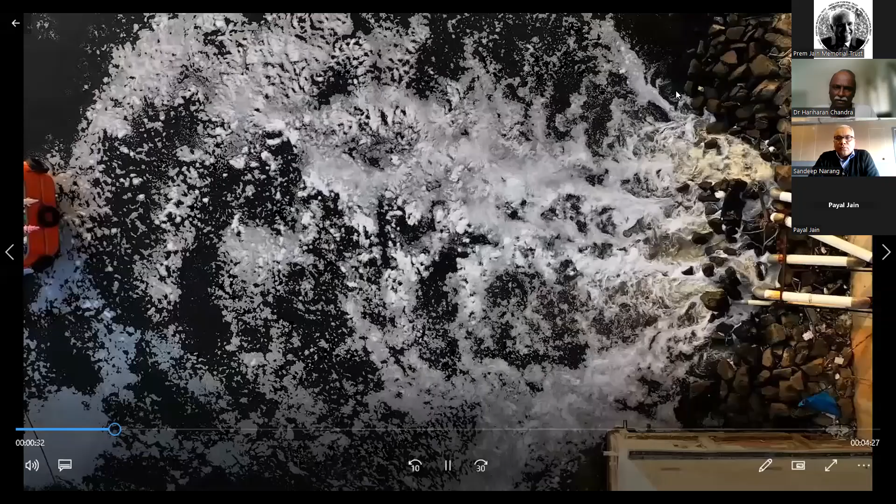Okay, fair enough. Yeah, it's okay. We'll play it a little after if it's necessary.

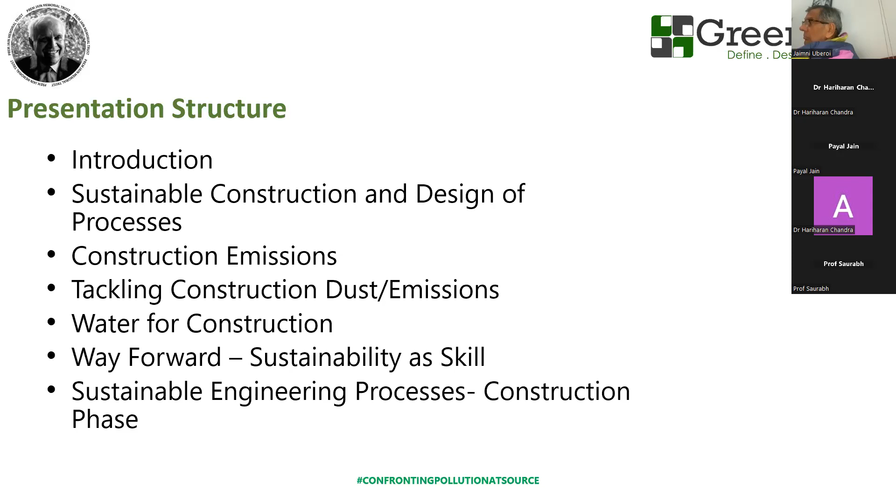And then the way forward for sustainability as a skill and sustainable engineering processes in the construction phase. Because I believe lots of civil engineers or people from the construction fraternity are over here - I am myself a civil engineer - so how civil engineering has evolved over the years. When I started my career in 1988, that's 35 years ago, in engineering we used to work within 3 triple constraints, we used to call them: cost, quality, and time. These were the 3 factors we looked at whenever we had to take any calls or decisions within projects - whether it affects the cost of the project, whether quality is getting compromised, whether time is getting extended. But what has changed over the last 5 to 10 years is that sustainability is now an equally important pillar.

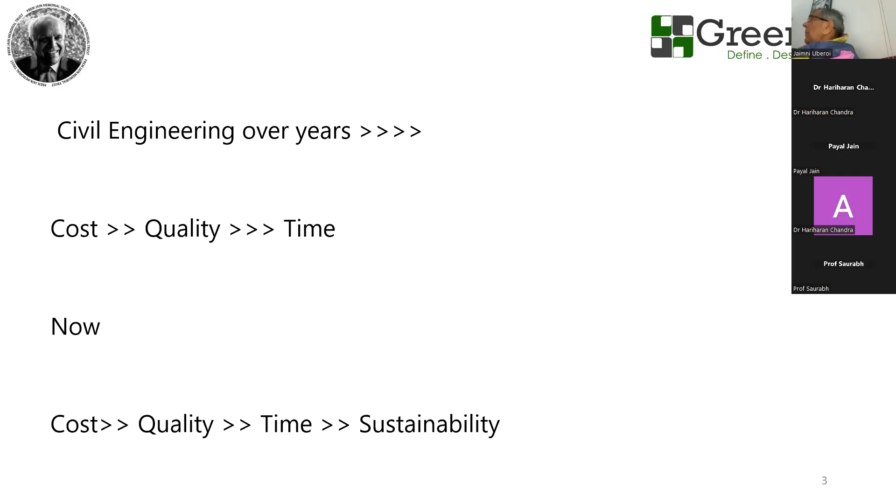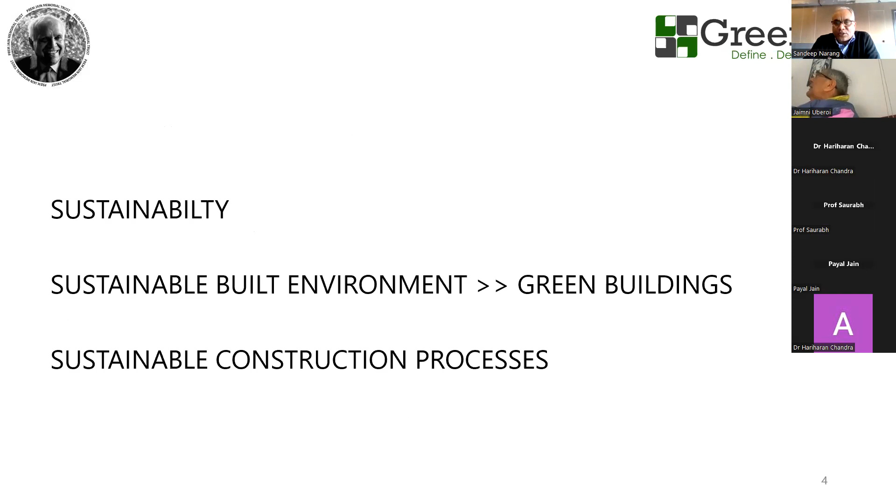So from the triangle of cost, quality and time, we have shifted to the rectangle of cost, quality, time and sustainability. Air quality is stopping work not only in Delhi, but Mumbai also, and sustainable processes, sustainability, sustainable built environment, green buildings, sustainable construction processes - these discussions are happening within the construction fraternity.

Why are these discussions happening? What we have seen since 2009-10, when the green building movement started, is that within the construction scenario, any construction project goes through three phases. One is the design phase, second is the construction phase, and third is the operation phase.

Design phase - if you talk about a real estate project of say 12 towers, that's usual in NCR or anywhere - takes at least 12 to 18 months, when the project gets conceptualized or designed. Because architects are well aware of green buildings and sustainability, a lot of capacity building has happened there. So the designing is green.

Then comes construction - 4 or 5 years that the project is under construction. What's happening during those 4 to 5 years when the project is constructed? The same green buildings which are being designed - what's happening within that construction scenario? And then comes when the building gets handed over to the end user.

So in the operation phase, we tend to get the results out of whatever design has taken place, or the design engineering shows the result of energy efficiencies.

But the fact is that during construction, not even the bigger companies are bothered about water efficiency or energy efficiency. Are we spending the right energy? Everybody is in a rush to get the construction completed. Even the outdoor air quality during construction is neglected. So the construction phase is somehow not green, that's what I want to say.

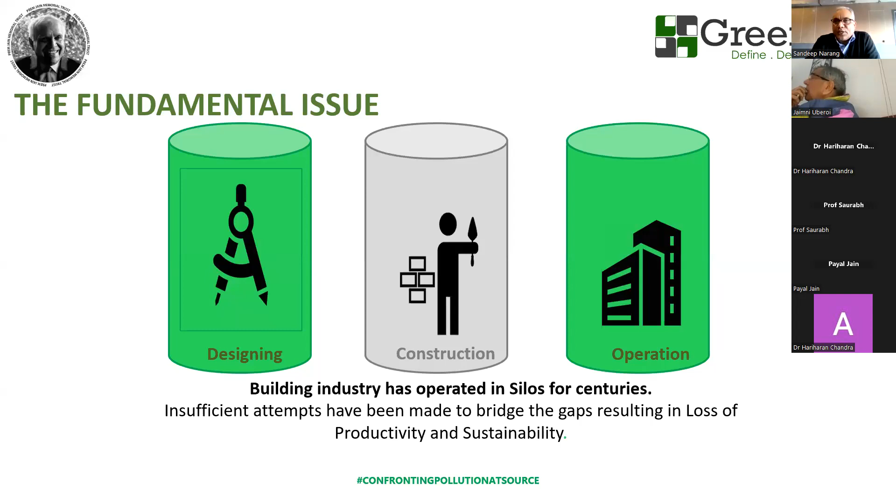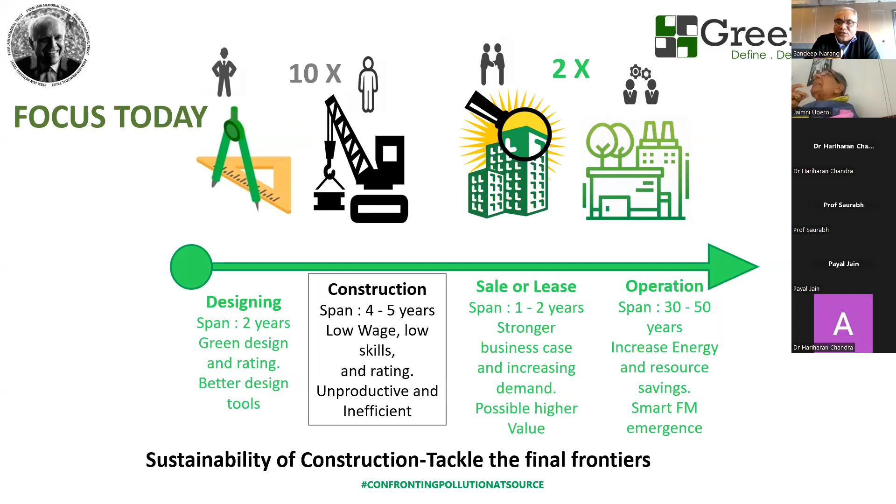And why is that? Because during construction, we work with low wages, skill sets are low, and unproductive and inefficient techniques are being used within India - that's in the majority of projects. So that's one of the reasons why I would say that sustainability of construction is tackling the final frontier in the landscape of the green building space.

What do we mean by sustainable construction practices? Intelligent utilization of water during the construction phase, measurement of energy and water consumed during construction. It's a rarity - nobody is even measuring how much energy we could have saved during a construction phase.

If I give you a small example - say if a project is worth 1000 crore, the energy cost to the project, that's from what we get from the grid or the fuel we use for the gensets, is close to 4 to 5%. So 40 to 50 crore rupees is being spent on energy bills or diesel bills or gensets, and there is easily a scope of saving at least 10 crore from that. But nobody has come up with the data or shown the intent to save energy during construction.

That's the hallmark of a green building. Air quality for construction will be the focus topic today. Reuse of construction and demolition waste - can we create zero wastage projects, projects where we are not wasting any of the natural resources? That's one of the ideas where I want this discussion to go.

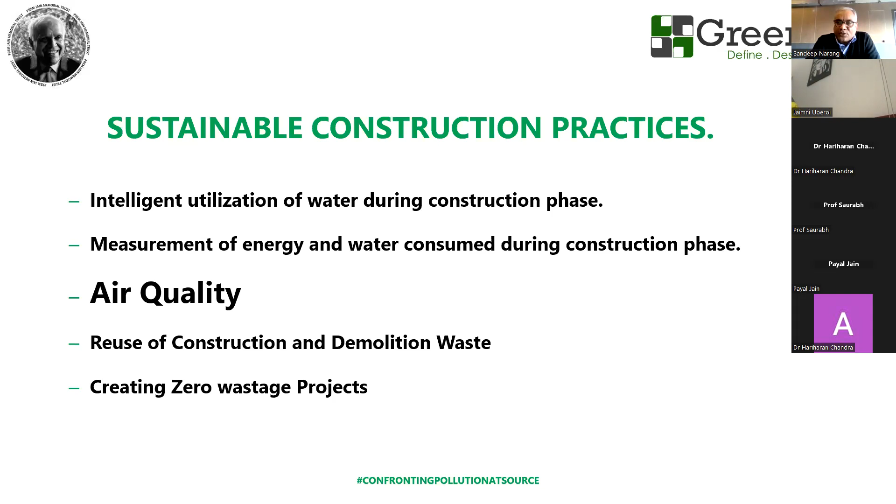And why I'm talking about construction and how this has come into prominence - around 6 years ago, the Honorable Prime Minister came up with the National Clean Air Programme. It's written for 122 cities, but it's 131 cities now, where air quality has gone beyond what's recommended by the CPCB, Central Pollution Control Board, for good health practices.

Delhi is one of the most polluted capitals of the world, we all know that. Besides Delhi, there are 131 cities - even Jaipur is a very polluted city. Mumbai, although on the seashore, had a 10 days construction ban in December because of the AQI level going beyond 250 to 270. So this is one of the problems.

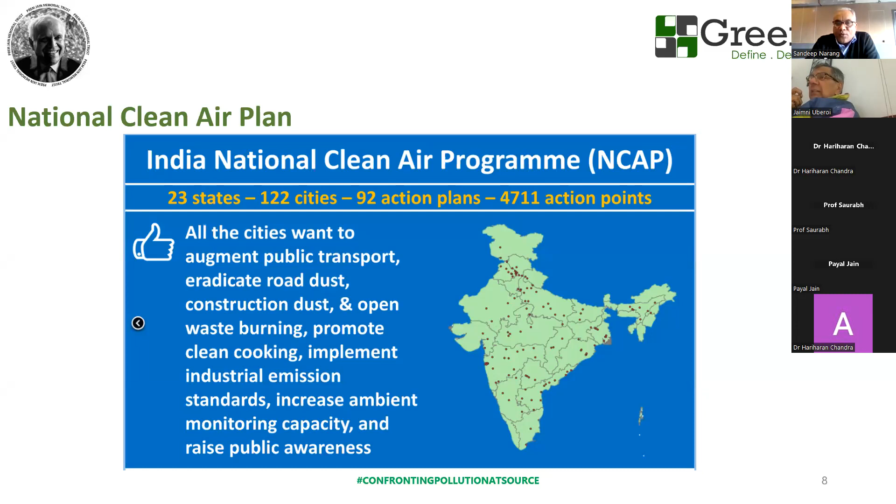And what happens once a city is a non-attainment city - they do an apportionment study. Apportionment studies look at from where all these pollutants are coming - usually industry emissions, transport emissions, municipal solid waste burning, or emissions from construction projects, road dust. Based on the apportionment study results, we start treating each polluting source.

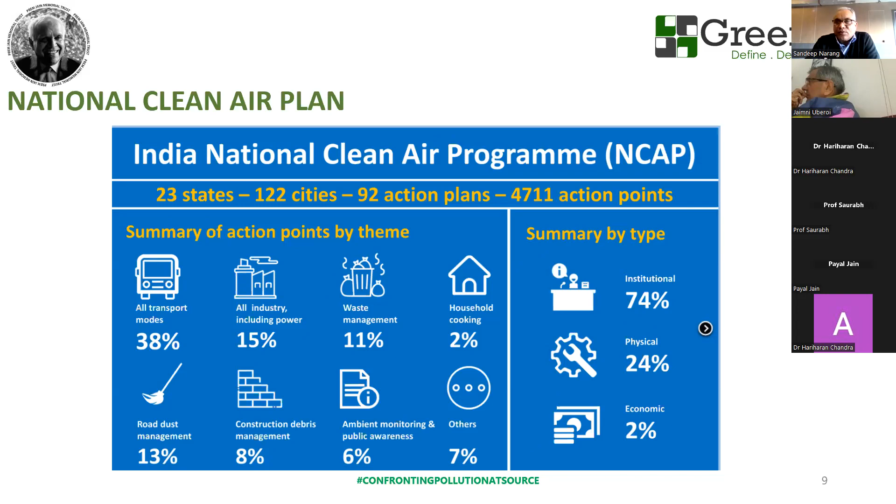I am working in the field of construction emissions with a few international organizations as a consultant. Why are we talking about this? Yeah, I worked as senior vice president for a real estate company. When a project which you are heading gets fined by government or anyone, it gives you a very bad report.

This is a news item from October 8, 2021, the first day of GRAP, the Graded Response Action Plan, in Delhi. The day AQI went beyond 300, Delhi government ordered a ban on construction sites. Delhi Environment Minister Gopal Rai went for an inspection and fined a construction firm 5 lakh rupees for violating dust control norms in Delhi.

Why is this very important? Because that project site was in Pragati Maidan, the ITPO, India Trade Promotion Organisation site, and the company doing the construction was L&T, which is the number one premier construction company. There were smoke guns over there, and the tarpaulin net had been put up for show, either in parts or completely torn apart. That's what the news item said, and the company was fined 5 lakh rupees.

I was doing one of the capacity building programs for DPCC, and I met the project manager, the project head of that project site, and he was feeling so bad. He said, Sandeep sir, I'm feeling so bad. Why am I showing this? At project sites, whenever anything goes wrong, we do root cause analysis - why this thing has happened at my project site, why my site got banned or fined - and we try to find a way. We civil engineers, that's part of being project management process, to do root cause analysis.

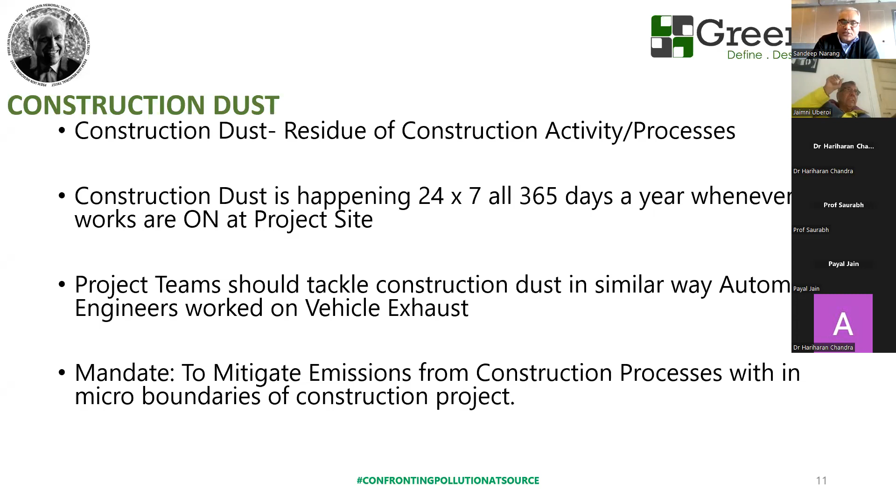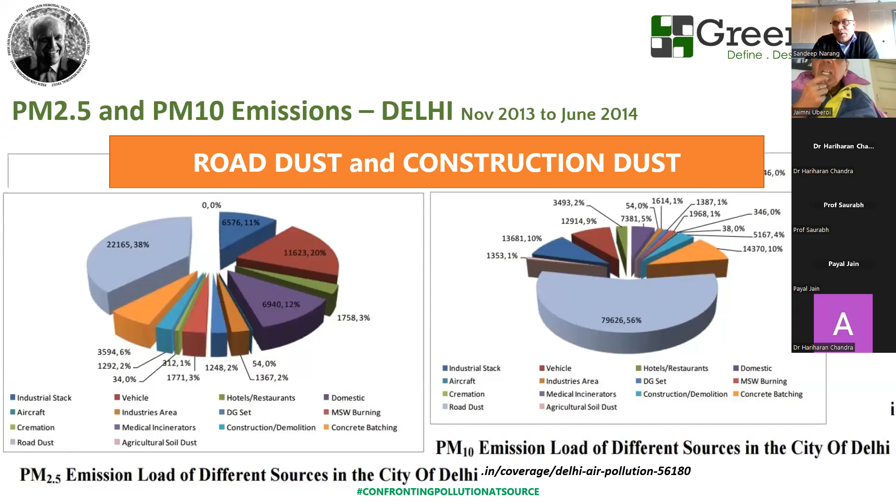And for the information of Jaimni Uberoi sir, in Jaipur, road dust constitutes 70% of PM 2.5, if you go through this same apportionment study of PM 10 for Jaipur. So there is a lot - if you travel around Jaipur, going around the streets, we can see there is lots of road dust. But it is more in Jodhpur than Jaipur.

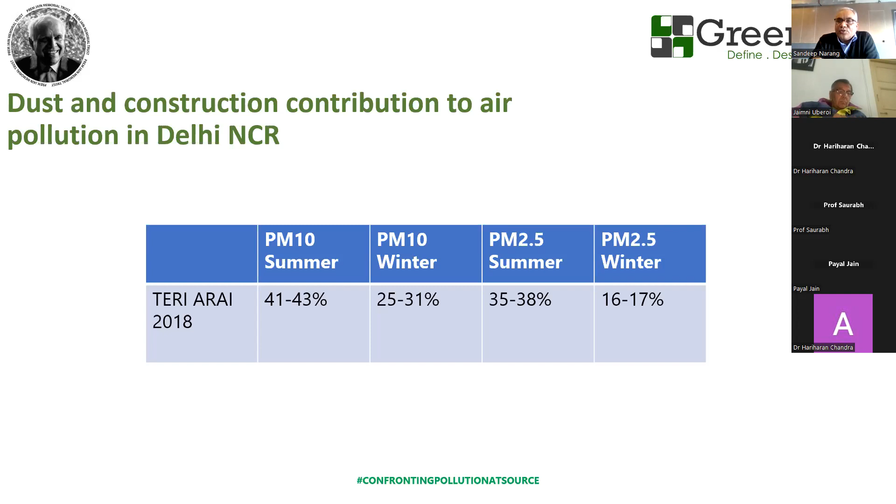Yes sir, so dust and construction contribution to air - now this is another interesting study. In summers, we see more PM 2.5 and PM 10, around 20 to 30% more construction emissions happen during summers, but not in winters. But what's happening is, because of the climatic conditions in Delhi, our construction projects get banned during the winters, which is again a point we've been putting across to DPCC, NGT, and others, that we shouldn't be banning construction projects, rather controlling the construction emissions.

I'm part of this study happening at Surat, as Dr. Hariharan had mentioned - road dust source apportionment, looking at what proportion of construction dust goes into road dust. There are no studies in India about this, so we'll be doing the first one. From preliminary reports, construction dust is responsible for a very big fraction of road dust. Wherever construction is happening, you can see the percentage of road dust is very high. Like people who live in Delhi, if you go around Pragati Maidan, you'll see it because that underground tunnel was being constructed there - there was lots of road dust around Pragati Maidan.

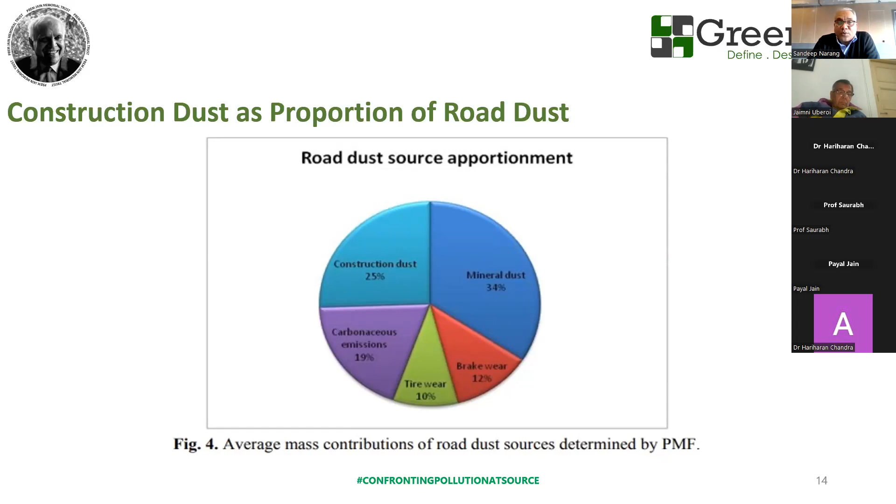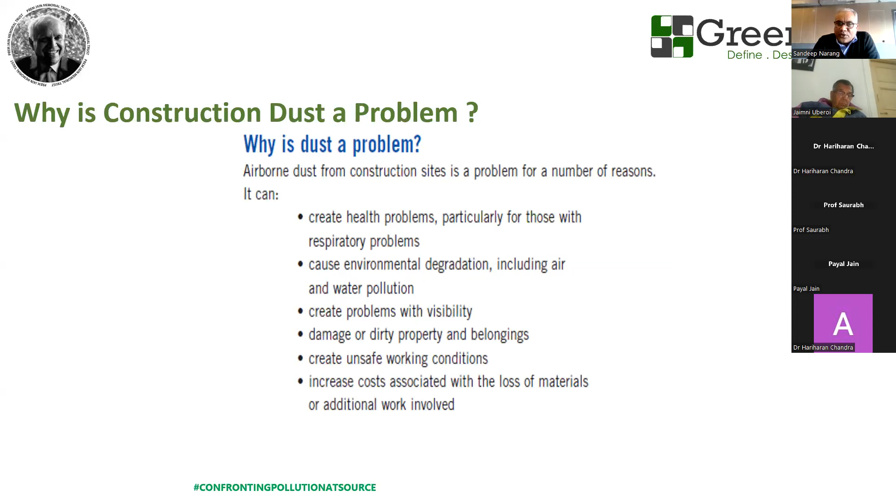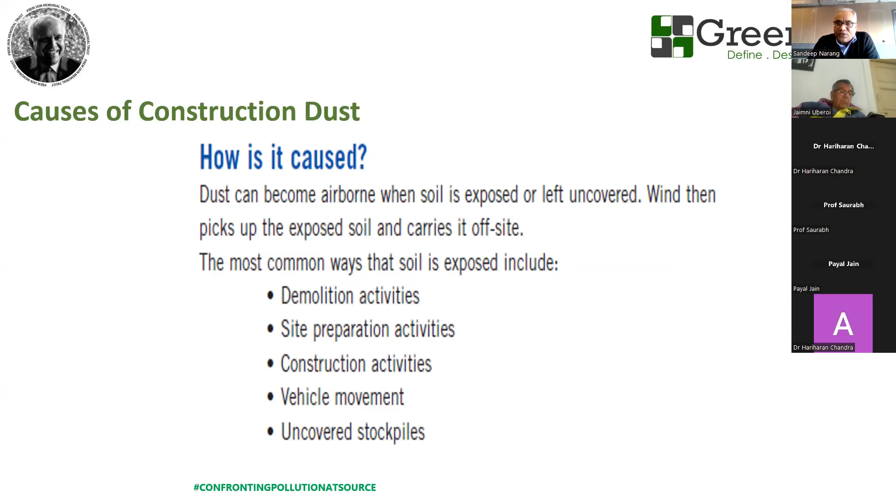Why is construction dust a problem? It creates health problems, environmental degradation, problems with visibility, and unsafe working conditions. These are a few processes that cause construction emissions: demolition activities, site preparation activities, vehicle movement. The benefit of effective construction dust control is huge within the landscape happening in Delhi - it makes you a responsible company, and we are losing lots of finances because construction is being closed for a month every year.

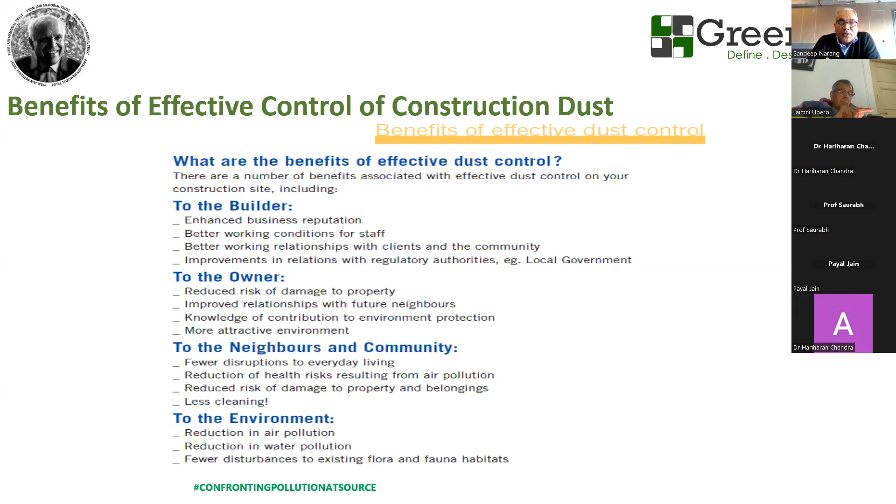There are two factors on which the amount of construction dust depends. I am working pan-India on this subject. One is the soil type. In Delhi or Jaipur we have alluvial soil where the clay percentage is more, so whatever small disturbance we do to the soil, lots of PM 2.5 comes out and hangs in the atmosphere. Whereas working in Maharashtra or Gujarat is easier because there we have black cotton soil, which is more firm and has less clay content. So soil type is very important.

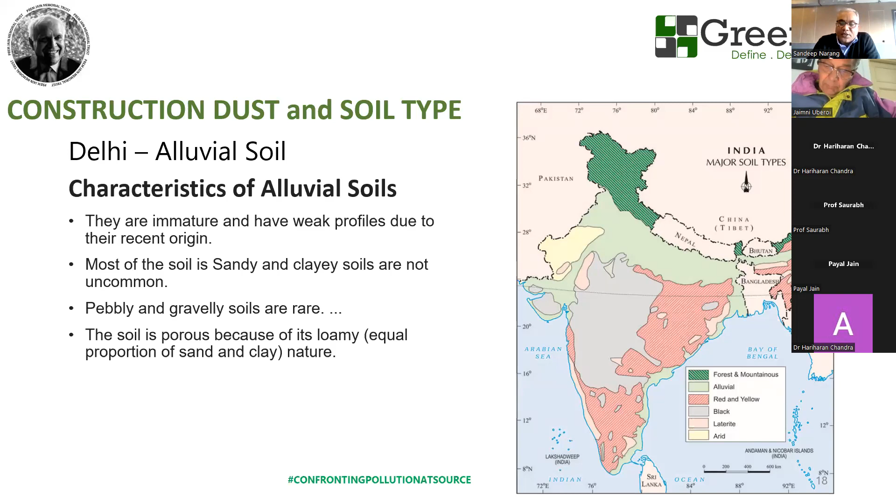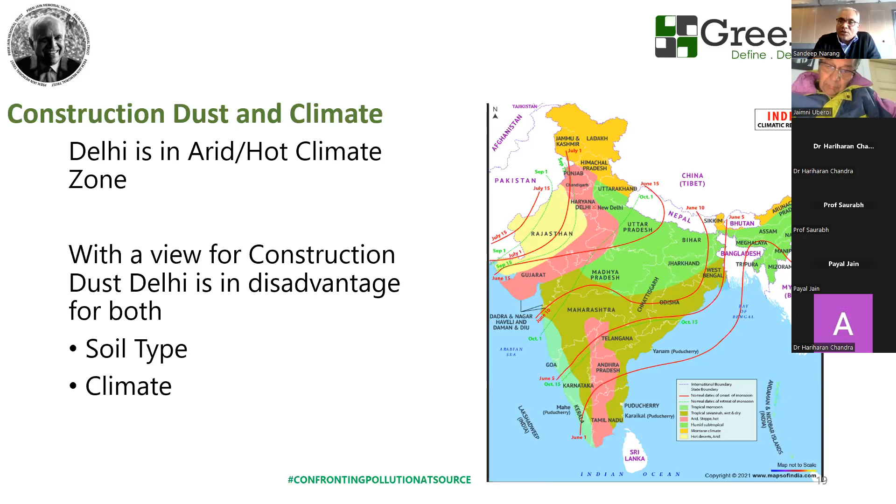The second factor is the climate zone where we are working. If the engineering team can understand the soil and climate, the same excavation happening in Delhi in July-August will produce less PM 2.5 and PM 10, whereas when it's happening in March, there will be more construction emissions. So the construction project team can manage that by doing lots of fogging or improving the moisture content within the project site. These are the two factors.

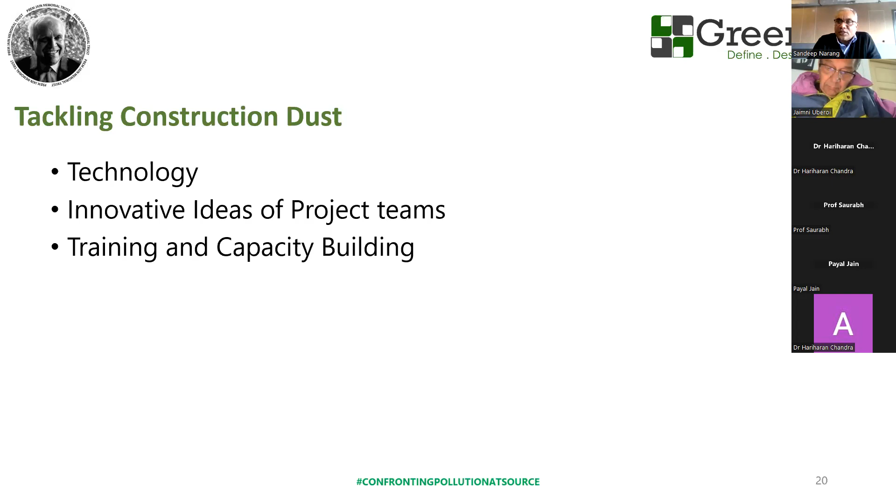We go through three points when we tackle construction emissions: use of technology, innovative ideas from project teams, and how project teams can tackle construction emissions. This subject is very new - very few people are having discussions on this in India. I am the only civil engineer who has put together 3 or 4 guidelines for different municipalities on how to work on construction emissions, training and capacity building. This is also one of the factors, because people working on project sites have zero training on how to tackle construction emissions.

National Building Code, Volume 2 - I even put the page number - says that we should be measuring outdoor air quality within construction projects. In Delhi, for the last 2 years it was made mandatory; in NCR, it was only made mandatory last year. It's already there in the National Building Code, but none of the projects pan-India put up air quality monitors to know what's happening around the project site during different processes.

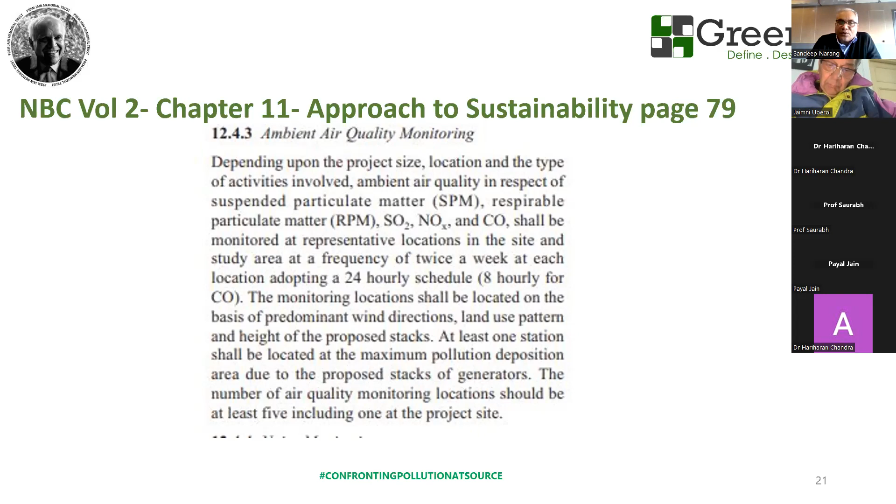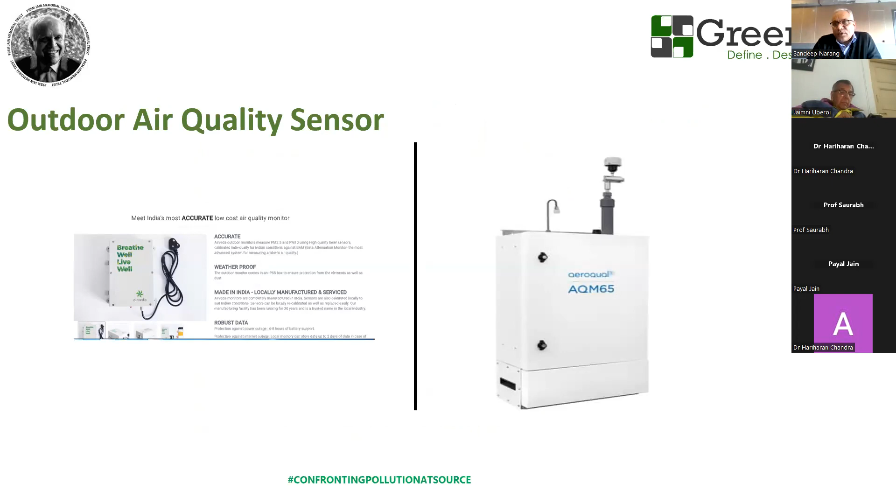So outdoor air quality sensors - we have been talking to NGT, the National Green Tribunal, and pollution control boards. We requested them to allow low-cost air quality monitors, and they are okay with it. So all construction projects or the construction fraternity should be doing air quality monitoring. I will show the case study where this helps too. So monitoring for construction dust is one of the very important uses of technology.

Fogging machines for settlement of dust - in Delhi it's again mandatory, not in the rest of India. It's important because when we know about the processes, fogging should be process-based, targeting whichever process is emanating PM 2.5 and PM 10. If the project team has a fogging machine, they can control PM 2.5 and PM 10. But in Delhi, what they did was mandate 3 hours of fogging in the morning and 3 hours in the evening - that's a waste of water and energy, because construction sites are not emanating emissions all the time.

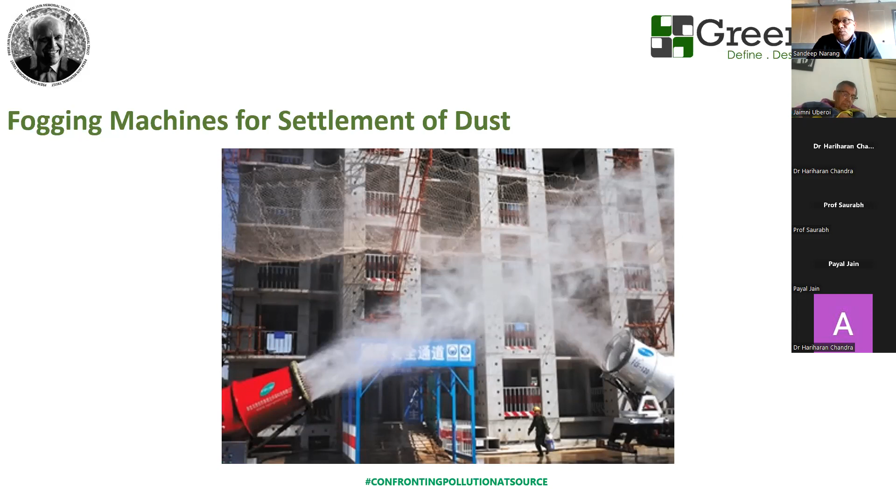There are only few processes which produce emissions, and the project team has innovative ideas. The project team knows best when to use this fogging machine. So I have been putting this point across with pollution control boards, and a few of them are accepting this - not to make fogging machine mandatory, but process based.

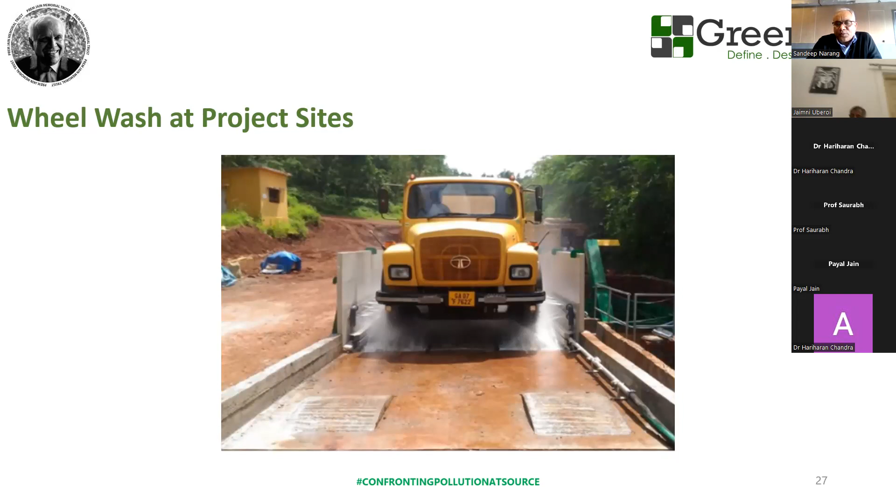Fogging machines are very good for settlement of dust when demolition is happening. Wheel wash at project sites is also mandatory again. Very few projects have these wheel washes at the site, and it doesn't add very much to the cost - hardly 3 to 4 lakh rupees is needed, and even the water used for the wheel wash can be recycled.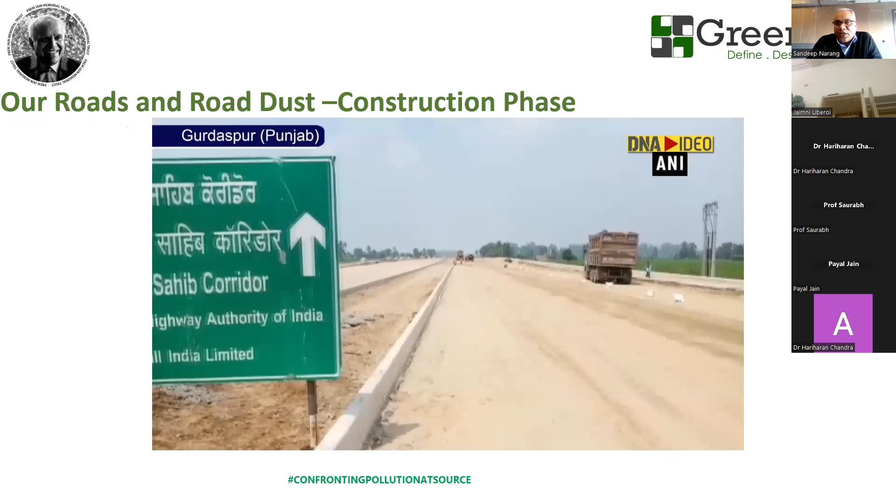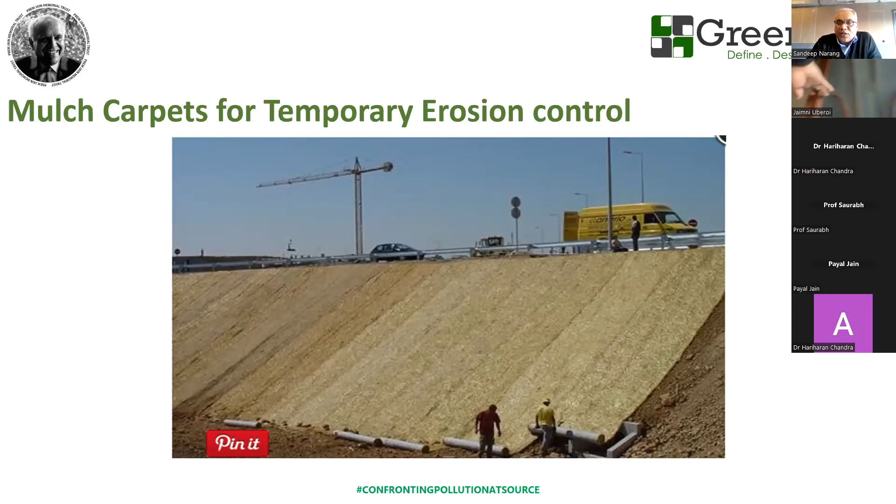This is how we did it - this is a photograph from the road construction happening for the Kartarpur corridor in Punjab. This is how we construct the roads, and outside India they use mulch carpets to help stabilize the banks. In India we don't do that. Mulch carpets are very effective and very low cost solutions.

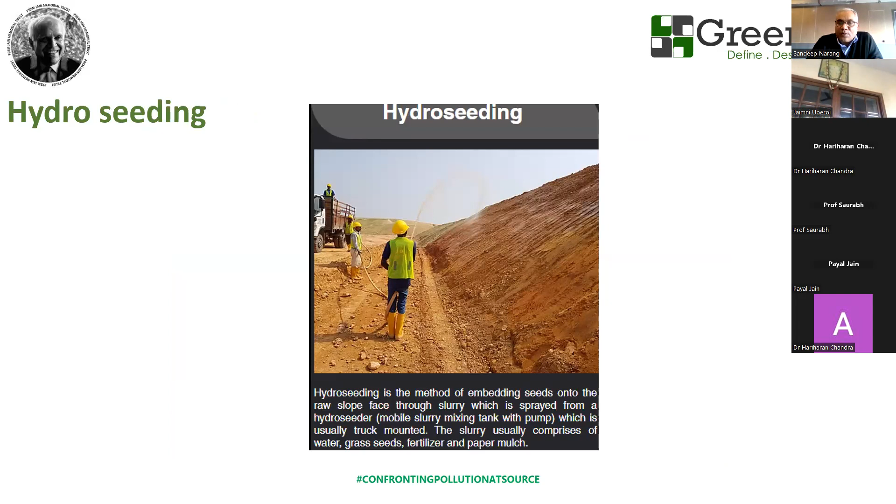Hydro seeding is one of the solutions rarely practiced in India, but now in Delhi and other areas we are trying to make companies realize that by just putting low cost grass on the embankments, it will help curtail erosion. Hydro mulching is also one of the ideas.

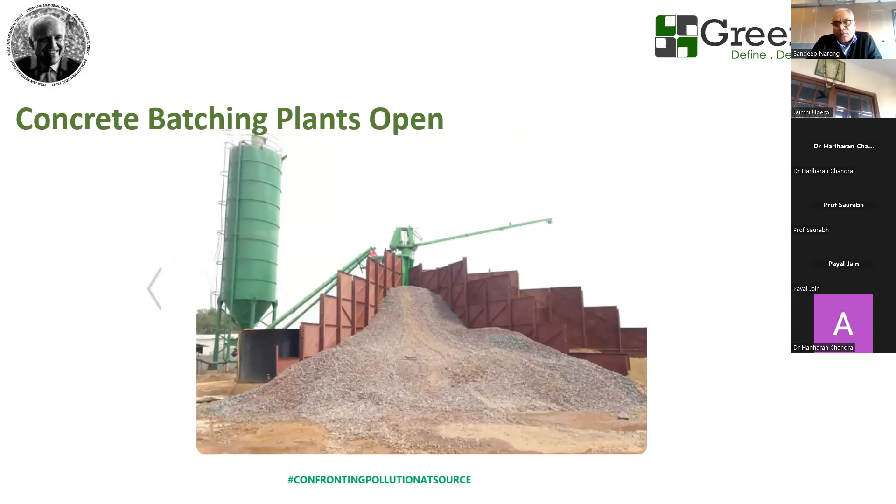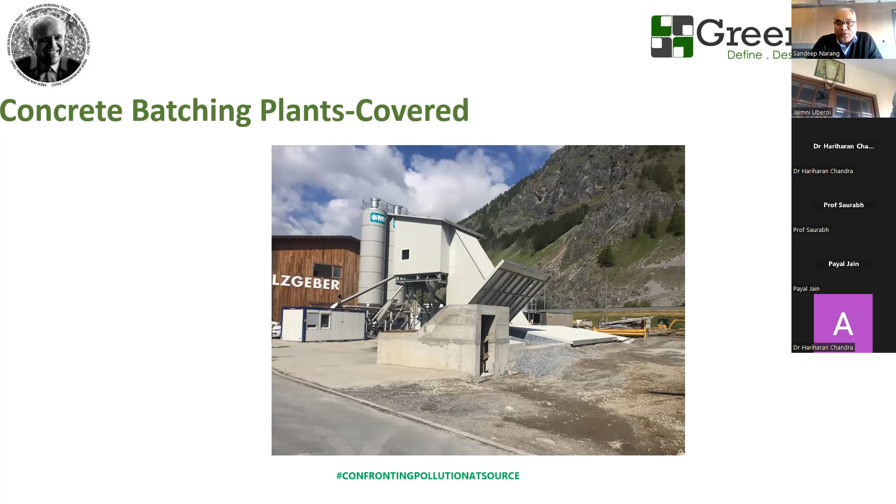Concrete batching plants are open in Delhi and North India, whereas the Pollution Control Board or Maharashtra Act say you have to have closed, covered concrete batching plants, which will be effective in controlling construction emissions from a batching plant.

We have a project schedule at all projects. Similarly, if we can have a construction dust mitigation schedule, there will be no surprises for the project team - we the project people will know when this particular process will be happening. We have a whole 60 months project schedule, so if we can use this to create a construction dust mitigation schedule, it will be quite helpful in controlling construction emissions.

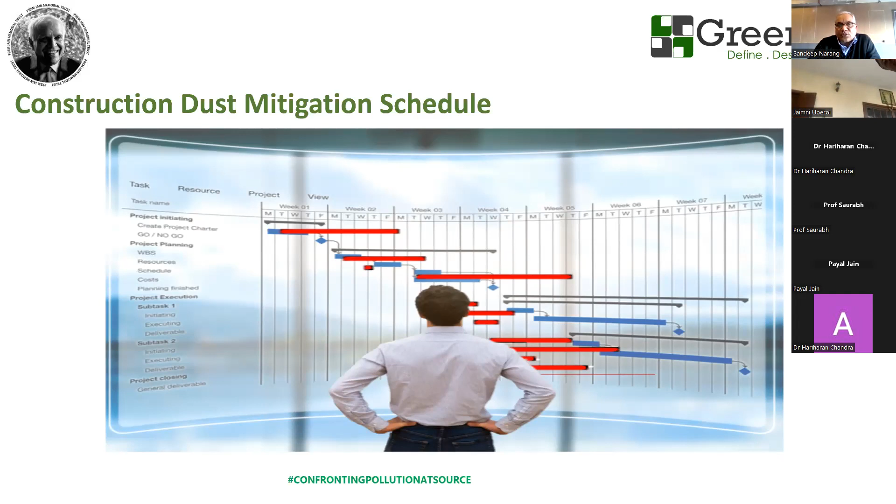I have been part of 3 or 4 handbooks I have mentioned that can be downloaded from the internet for free - one from the WRI site, the other from the Clean Air Asia site. These are the 2 handbooks where all these discussions have already been mentioned. Dr. Hariharan talked about the work in Surat.

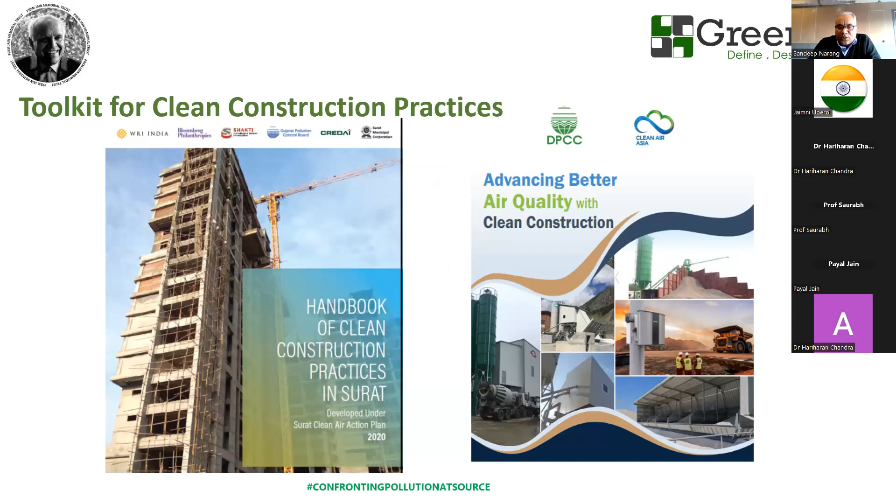So this is my first part, what I wanted to talk about - air quality. I will take just 2 or 3 minutes talking on the water part.

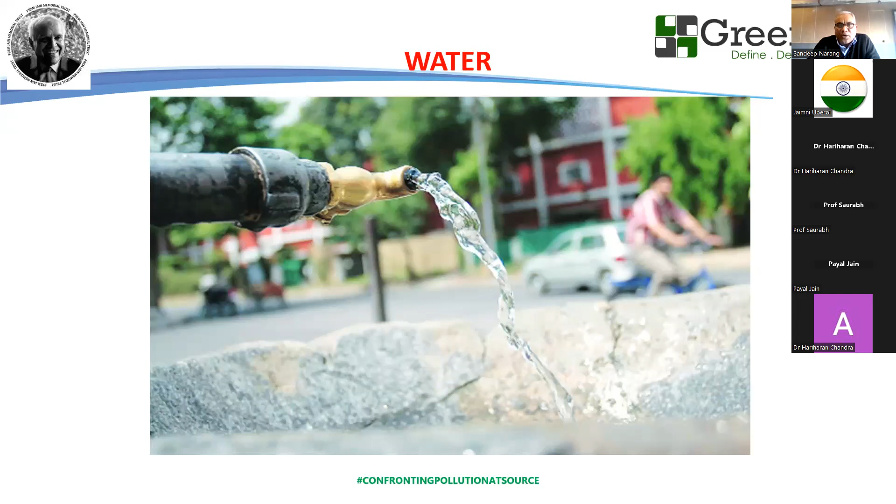Underground water extraction was banned in Delhi, but still we have been taking out water, and even in Noida there was a government decision to ban construction. They said we don't have water for the houses already constructed in Noida, so why make more construction? We are losing water at 3.87 meters per year of the underground table, right on the banks of the Yamuna or Hindon River. So there is no water.

Water in Noida - when I started my career, water was at 20 feet. Now it's at 400 feet in Noida. This is what has happened to water in India.

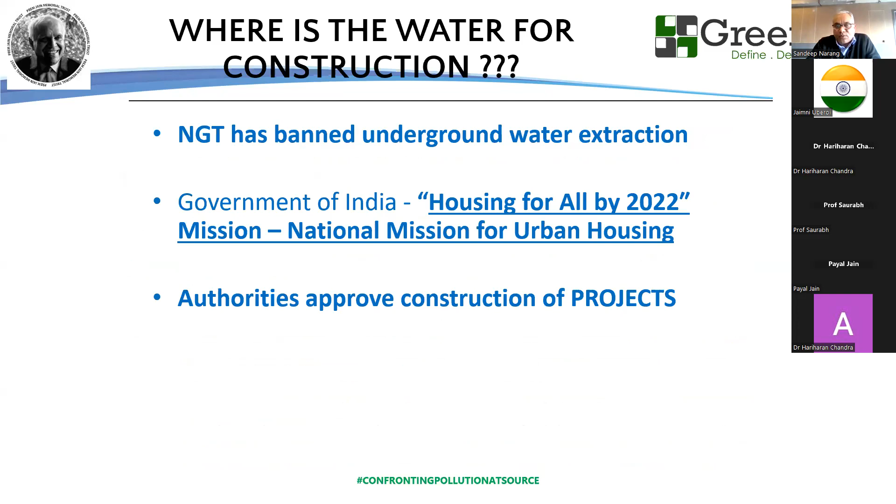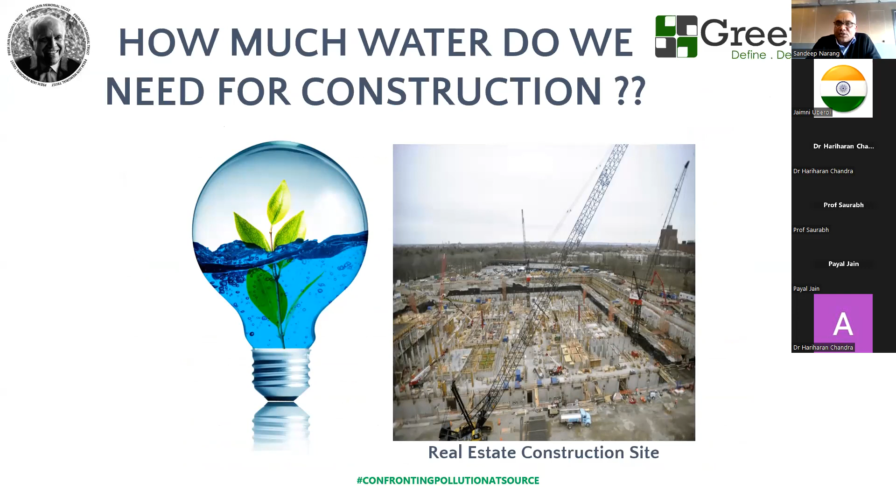Now NGT has banned underground water extraction for construction. Again, the government says housing for all, development has to take place. Authorities approve construction of projects knowing there is no water for construction. We are not doing any qualitative or quantitative studies of how much water we actually need for construction - direct water, embedded water footprint, is the water we need for the construction site.

There's only one study on this, from Dr. Suchandra - students who are interested can Google about this study. It says that 132 liters per square feet of construction was used in an 18-story apartment.

I did a few pilot programs where we quantified the water, and we came to a discussion that so much water is never needed. In that white paper by Dr. Suchandra Bardhan, she had two pumps at the project site - one was 6 bhp and the other 8 bhp, and whatever water was taken out was used as consumed water. Whereas from my studies, if we account for not wasting water, the same project can be done with 60 to 70 liters of water.

So any student or anyone interested in knowing more about this can contact me. I will be sharing my numbers and address at the end of this program.

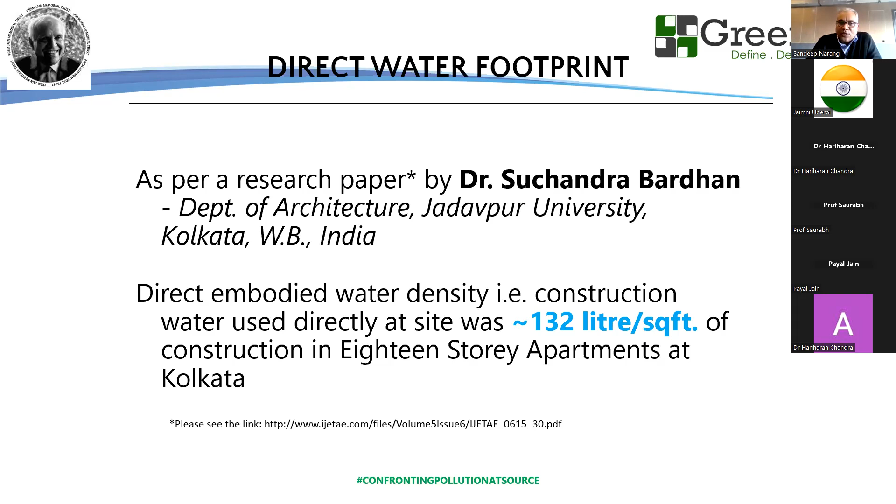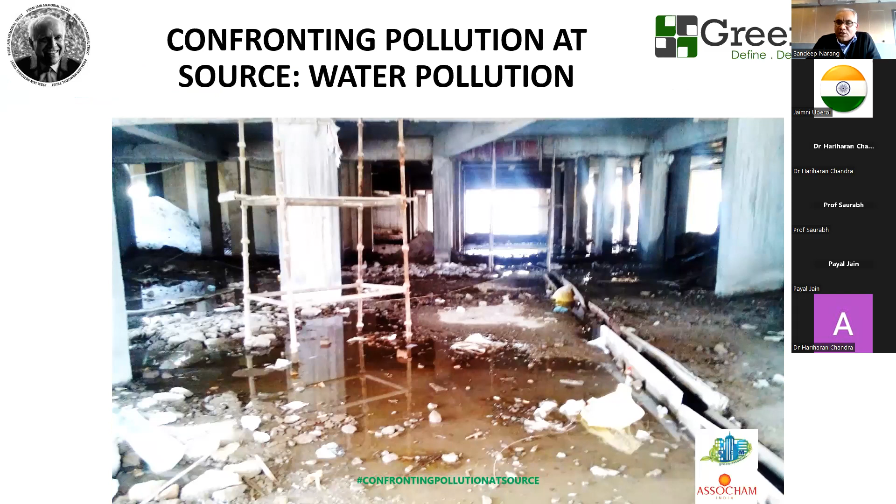If at a project site you see signs like this, water pools like this, it means that water is being wasted. If you see a basement of an under-construction project with water pooling, then it means water has been wasted at the construction site. These are bad photographs from a construction project I am showing in the presentation.

Now, what is the way out? We have been talking about problems on construction emissions and water. Why is this happening? In India, when we go and look at project teams and their skill set, people in top management are very few, and they have skill sets with respect to sustainability, or they have been exposed to other improved construction methodologies. What about mid-management? There are more people in mid-management, and the skill set goes moderate. And supervisory or staff workers are low-skill, lowly paid workers, and their skill sets are absolutely zero.

And this we call the knowledge matrix of a project. We call it the iceberg of ignorance. The problems I have been talking about—tackling construction emissions, wastage of construction water—all these problems are happening with the people who have a zero skill set.

Again, how do we go about it at a project site? So at a project site, whenever we want changes to happen, we go through this, and this we call a man management technique. We call it the OODA loop: observe, orient, decide, act. Everyone uses it—even Swachh Bharat Abhiyan is one of the biggest examples of the OODA loop, where lots of observation was put into the whole citizenship of India to keep India clean.

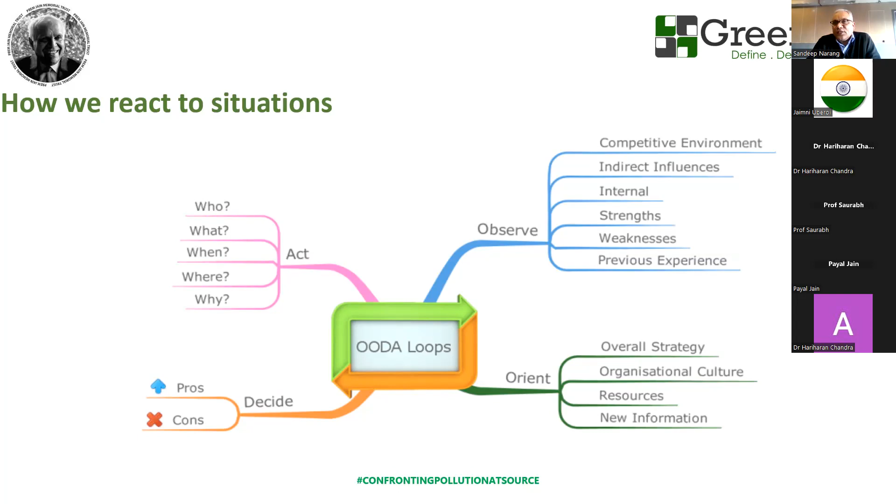All the big film stars, cricket stars, comedians—they came and helped keep India clean. The Prime Minister spoke about keeping India clean. But go to any project site, and you won't find any signages about not wasting water or any good thing that has to happen with air quality and construction.

If we talk about the way forward for construction companies and builders, it has to happen in three stages. First is the informative stage, where we should be putting visuals at site, going through that OODA loop. The company should be having a company policy for air quality during construction, water use, and energy use.

Then the second phase is the voluntary stage: train staff for sustainable construction practices and lean construction management. It talks about stopping wastages, or it classifies the wastages at a construction project. Then we can come down to the third stage, where we can link it with the key responsibility areas of the project teams.

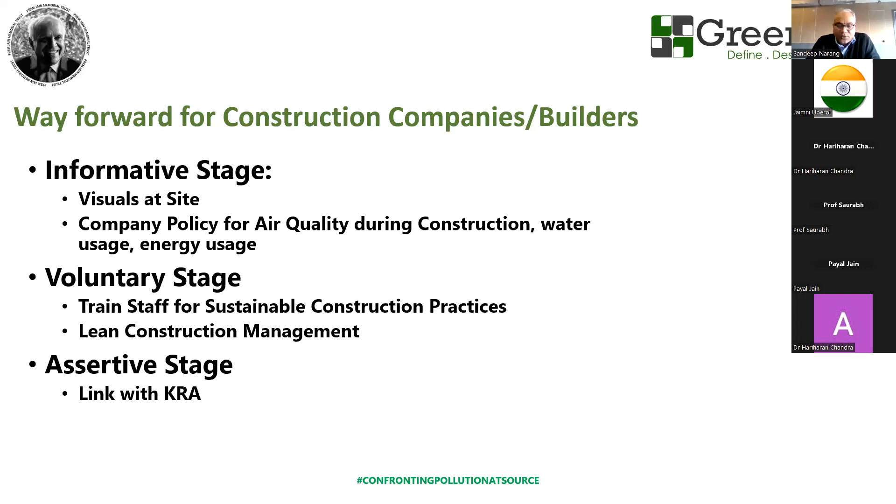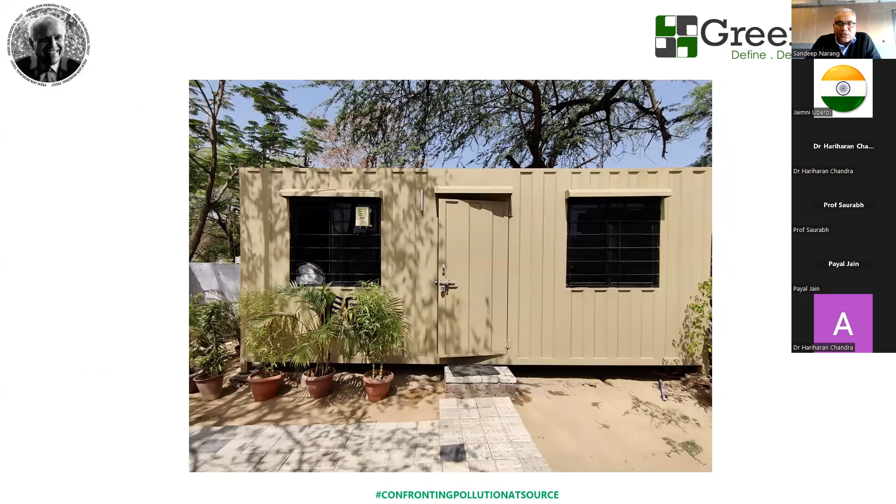I will show a case study of Jaipur. It's one of the Trimurti Group projects, where we have a single tower being constructed. I'm sorry I can't share the case study of Surat, because I am under a non-disclosure agreement, NDA, with WRI, where I can't talk about that project.

The reports will come from WRI, and that will be shared across, say in two to three months. Everyone will be knowing, and then even I can share it within my presentations.

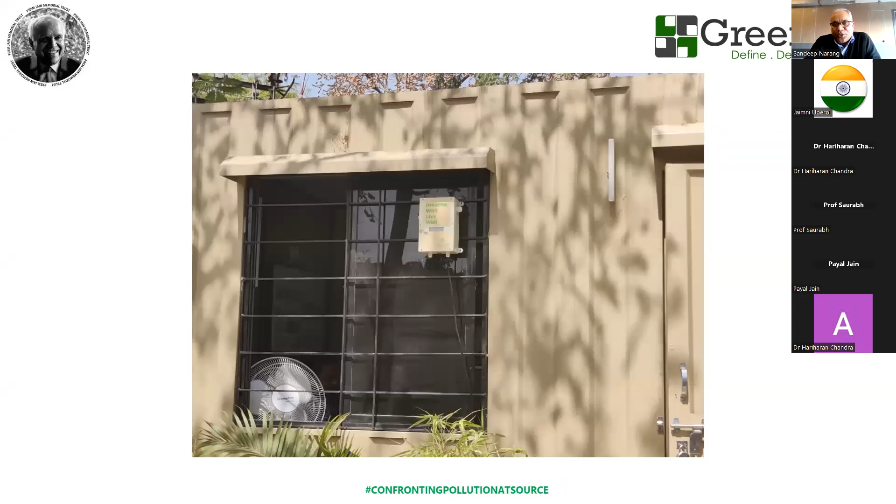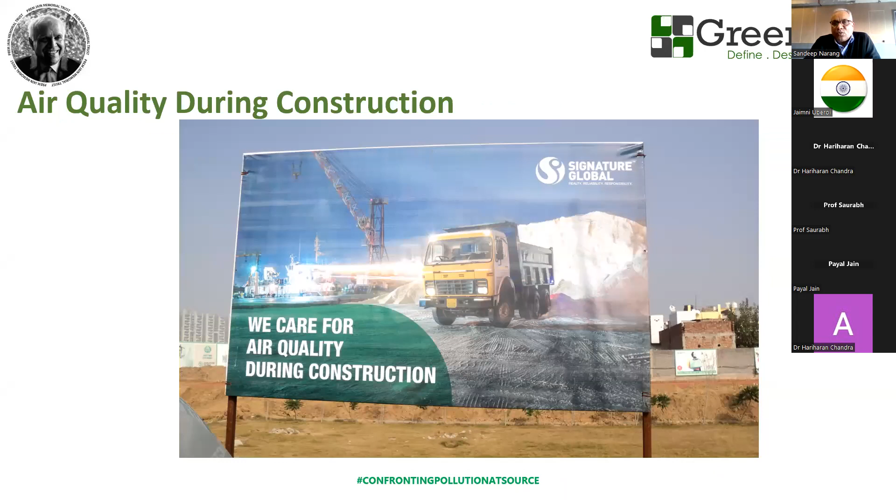So this is the project in Jaipur, where we had put one Airveda outdoor air quality monitor at the project. We had signages at site for awareness and training. These are the signages from the project site. These are signages at the Signature Global site, another project I have been doing.

So, this is the report of last year, 31st March, a 15-day report.

Now, because the structure work was happening within the basement level, PM2.5—the part written as Polcom is Police Commissionerate, the nearest CPCB monitoring station. We were monitoring twice a day, 12 noon and 6 p.m., when construction activities are at peak. On 31st March, when Police Commissionerate showed 70 PM2.5, our site was 12. It was way, way lower.

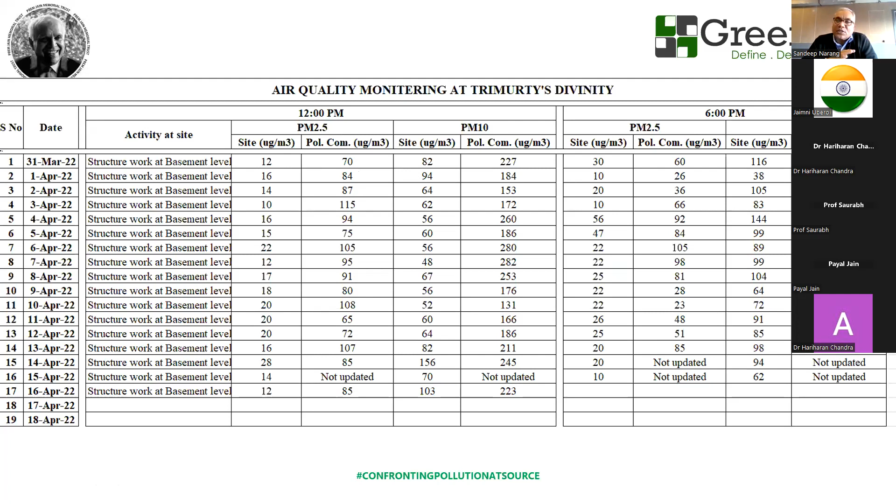Construction projects—I'm showing you this—and if you can go through any data of construction projects, PM2.5 or PM10 emissions happen or peak when there are a few processes that are emanating. It's not that construction sites are emanating it throughout when construction is happening.

Again, it's company policy for air quality during construction—there's a company policy of Trimurty Group. They train all staff on mitigation of construction dust during construction processes. They measure ambient air quality. They train contractors for transportation of materials in a safe manner. They do sheathing of the construction site to control construction dust from getting into ambient air, and dumping of construction and demolition waste with increased moisture content. They have also created a construction dust mitigation schedule for the project so that they know in advance what mitigation measures have to be taken.

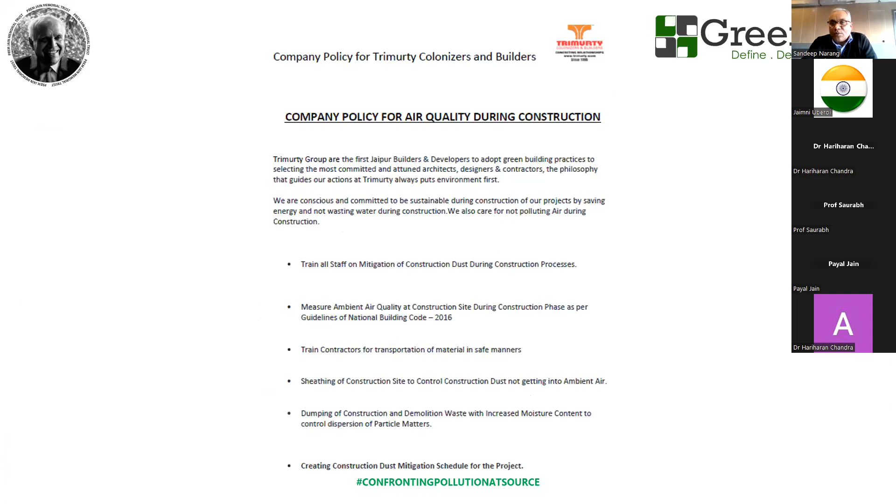Similarly, they have a company policy for water conservation also. That's the wrong way of doing curing.

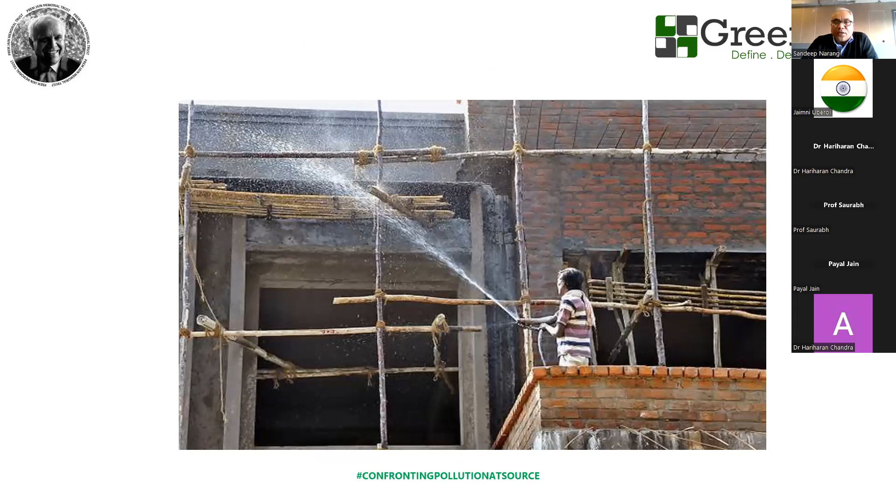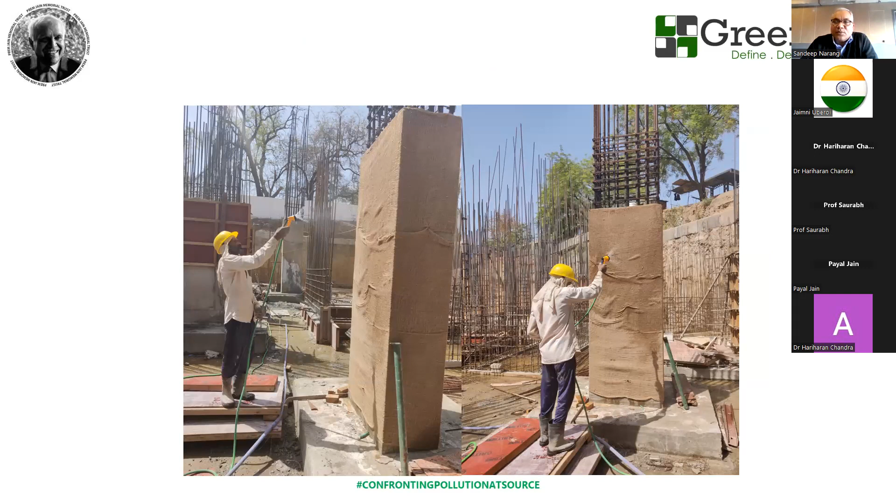And that's the right way of using nozzles where there are no runoffs happening. This is happening at Trimurty, Jaipur. These are the results when sustainable construction practices are being trained or done.

I've been talking about creating zero water wastage projects, or zero wastage projects where we don't waste natural resources during the construction phase. These are again a few of the signages at a few of the projects I have been working on as a consultant.

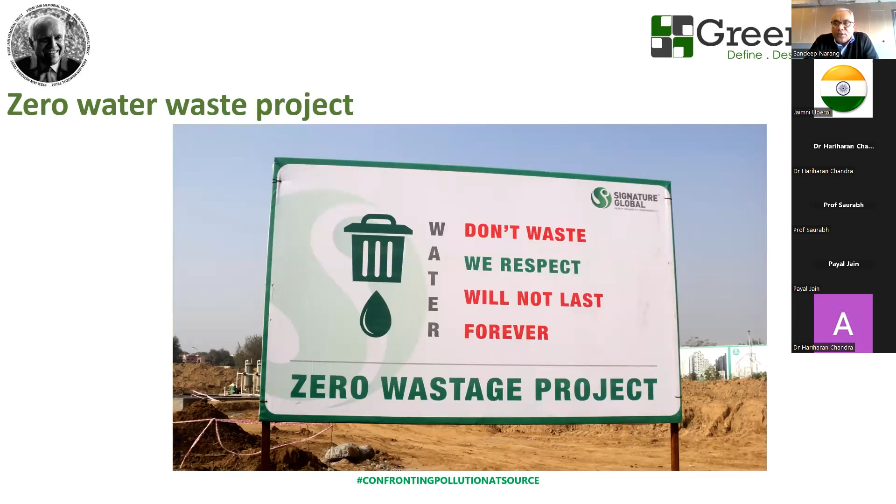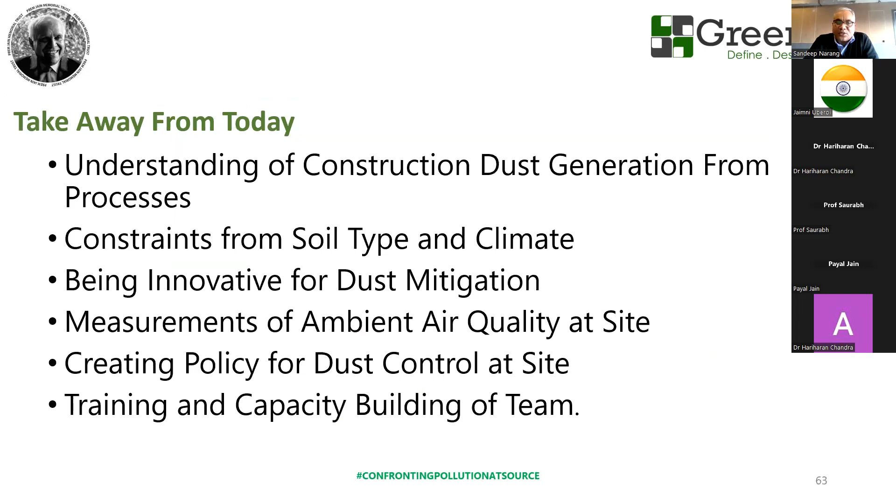So from my last discussion of 25 to 30 minutes, on understanding construction dust generation from the process, I talked about this. I talked about constraints from soil type and climate, being innovative for dust mitigation from the project teams. I talked about measurement of ambient air quality at site. I talked about creating policy for dust control at site and training and capacity building of the team.

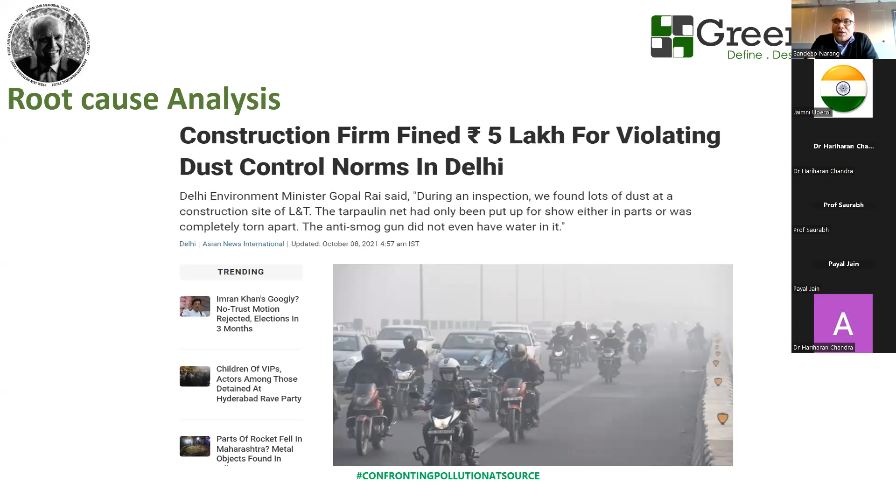Now I come back to root cause analysis. So I will request if the students or whosoever is here, if they were doing the project, to write down what they feel was missing with L&T and why they got fined. They already had all the smog guns at the project site, tarpaulins at the project site. They had all the resources. L&T always has all the resources and they have top engineers. So why, having top engineers, being a premier company, knowing all about the regulations, did the site get fined for 5 lakh rupees? I will request students or whosoever can put the comments or can come and talk about what could they have done to escape that fine.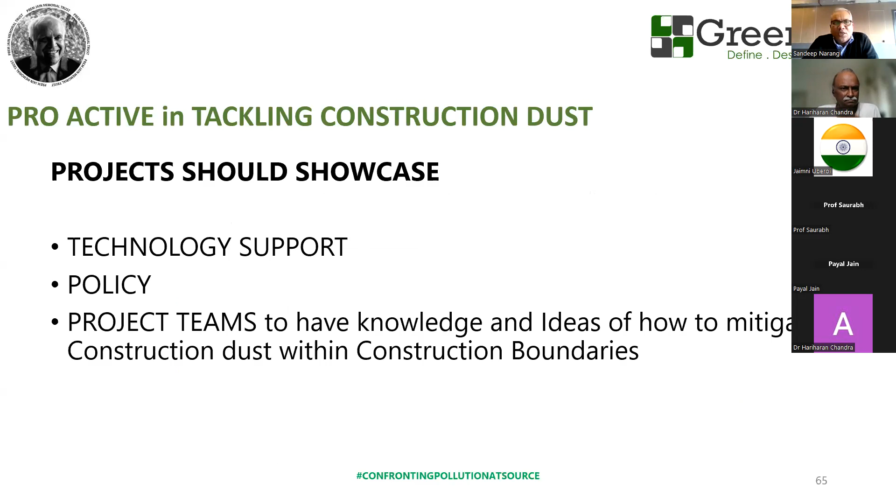And my last slide will talk about this. I always tell the companies or whichever teams I work with to be proactive in tackling construction dust. We should be showcasing technology support, creating policies, and project teams should have knowledge and ideas of how to mitigate construction dust within the project boundaries.

And this is my message to all the students and whosoever is here: in the race of excellence, there are no finish lines.